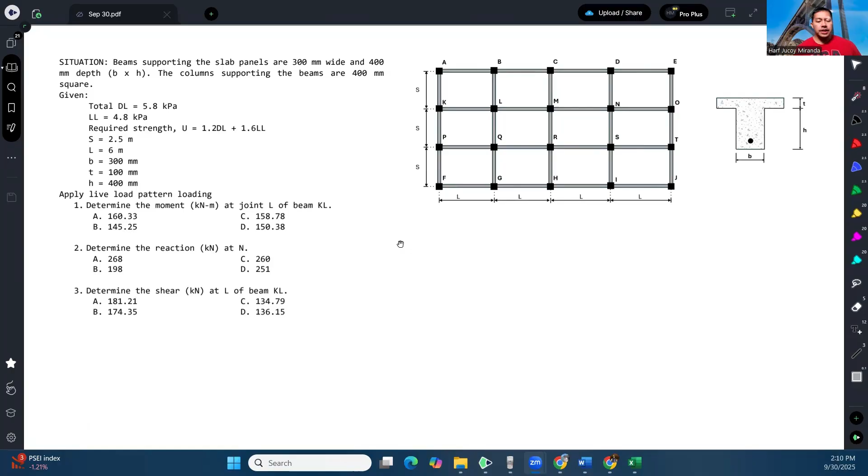Okay, so starting off with this situation. Beams supporting the slab panels are 300 millimeters wide and 400 millimeters deep. The columns supporting the beams are 400 millimeters square.

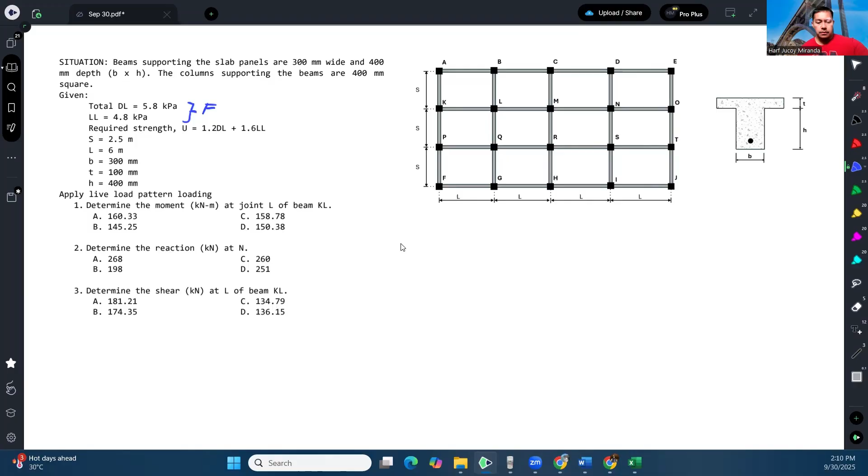We are given the total dead load and live load, both in kilopascals, meaning they are currently floor loads. And then we are given the required strength, meaning the load combination we need to apply.

So it's 1.2 dead load plus 1.6 live load. And then we are given the value of S, which is 2.5 meters, and the value of L is 6 meters.

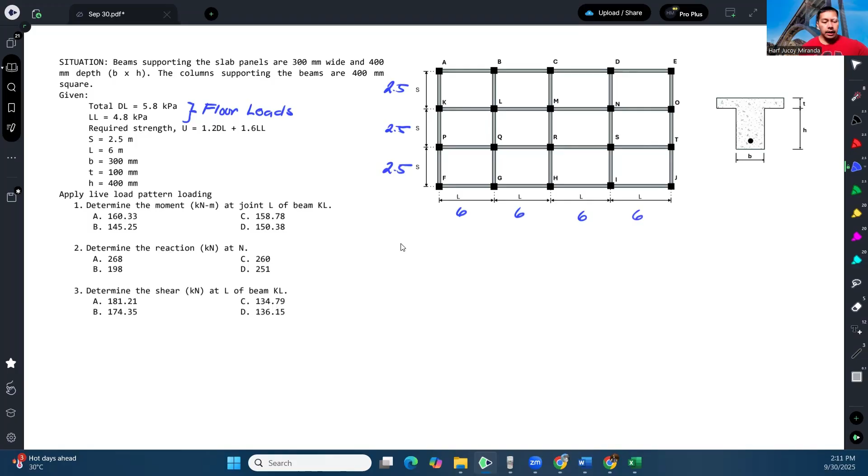We're asked to apply the live load pattern. So you will be given the following, the different patterns for live load. This is for four-span.

Continuous beam. Now, first question: determine the moment at joint L of beam KL. So this is beam KL, and we're asked to find the moment at L itself, on the left side. Actually, what's being asked is the maximum moment.

The maximum possible moment at joint L. And then next, we are asked to find the maximum possible reaction at N, at column N. And then determine the shear, or the maximum possible shear, at L for beam KL.

So first of all, we have to analyze, because we are given floor load. It seems that these loads are acting on this entire floor.

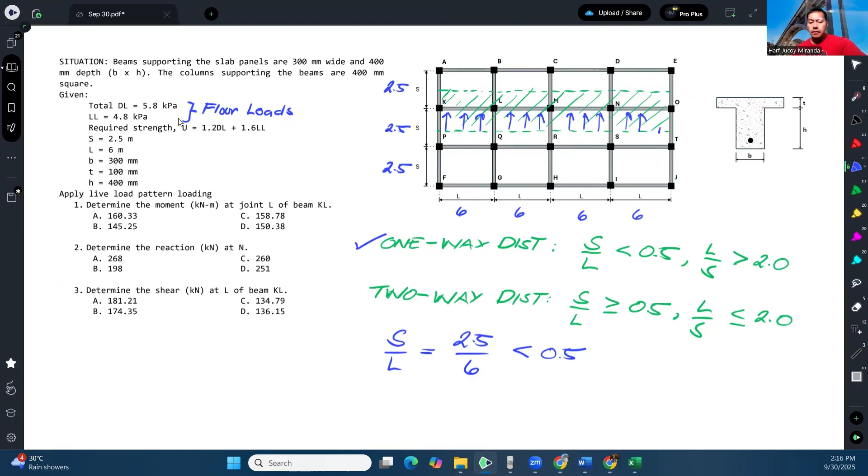Okay, and yung galing dito sa ibabaw, and basically yung magiging tributary width natin na ito, which is also equal to S na 2.5. Kasi same lang naman siya.

So half netong 2.5 plus half netong 2.5 will just be equal to 2.5. So meaning, we can now convert itong mga floor load na to. Tawagin ko na lang to na Q dead load tapos Q live load. Yan yung tawag ko sa floor load. Naka-Q muna siya kasi naka-kilopascal pa. So para ma-convert yan sa uniform load, we will just multiply by the tributary width.

Multiply lang natin ito. So we will have W dead load equal to Q dead load times yung tributary width, which is yung 2.5. So that would give us 5.8 kilopascals times 2.5, that gives us 14.5, and this is now going to be in kilonewton per meter. Kasi di ba originally ito kilopascal? Kasi ito naman naka-meter, so cancel, kaya magiging kilonewton per meter.

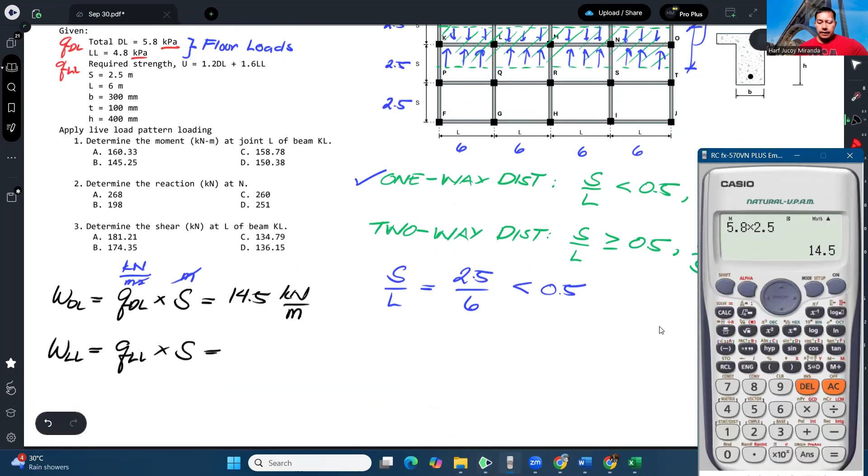And then ganun din ang gawin natin para sa live load. Yung floor load ng live load times yung tributary width, and that would give us 12 kilonewton per meter.

Okay, so meron na tayo nung distributed load na dead load and ng live load. Now, also I want to mention that since ito ay total dead load na, wala na tayong pakialam dito, dahil total dead load na yan, so ibig sabihin kasama na dito yung self-weight nung beam. Otherwise, gagamitin natin to, yung cross-section niya, kailangan natin computein yung self-weight niya. Pero for this particular problem, sabi kasi dito total dead load na yan, so hindi natin kailangan computein yung self-weight nung beam at saka nung slab.

Alright, so that's it, yan ay mga loadings natin. So ngayon, parang lumalabas na itong beam KLMNO, we will now analyze that in this particular section. Kunin ko lang to section na to. Ayan, section na yan, tawagin natin na section AA.

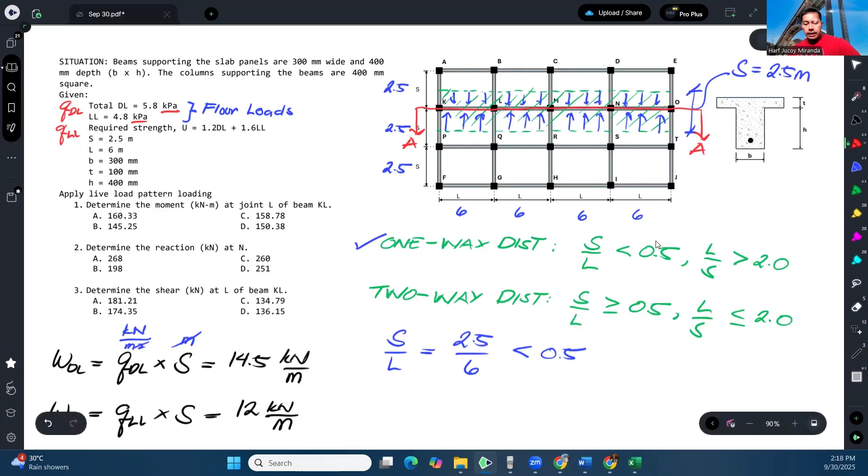So ang itsura ng section AA, bali ganito, lumalabas na ito yung beam na yan. Tapos yung support K, ito yon. Yung support L, ito naman yon. Yung support M, ito yon. Tapos ito yung support N, and ito yung support O. So K, L, M, N, and O, yun yung beam natin.

So as you can see, ano siya? Continuous beam na 1, 2, 3, 4, 4 span continuous beam. And dito again, pinapahanap lang ano yung moment dun sa joint L for beam KL. So pinapahanap lang yung moment dito.

So para makuha yon, of course, sabi niya apply live load pattern loading. So ibig sabihin, una, hindi natin pagsasamahin itong dalawa, kasi pag sinabi nating dead load, yung pattern loading does not apply to dead load. Paliwanag ko lang kung ano bang ibig sabihin ng pattern loading. Ang ibig sabihin lang yan, guys, ay yung lahat ng possible combination na kung saan loloadan natin itong beam na to.

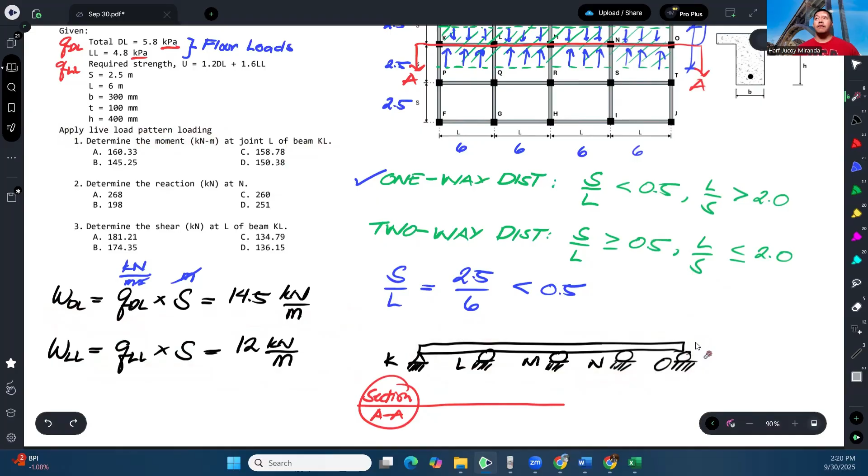Kasi di ba pag sinabi mong live load, pwedeng lumipat-lipat yan eh, pwedeng mag-transfer yan from one point to another. So well, it is possible na yung live load natin will be acting all throughout the span, pwede naman. Kaya lang, it is not necessarily the most critical condition or situation. So minsan kasi nagiging ka for a specific criteria or parameter na gusto mong hanapin, like reaction or shear or moment, minsan kahit na-loadan mo lang siya ng isang span, mas nagiging critical yon.

Alright, kaya kailangan nating ma-identify ngayon kung saan yung proper o saan dapat yung most critical na loading condition for live load. For number one, para ma-achieve natin yung maximum moment dito sa L na to. Okay, but like I said, kapag dead load, hindi natin kailangan i-pattern loading.

So ang dead load natin ay basically, ilo-load na natin to sa lahat. So let me just copy this for later, gagamitin ko siya later. Ito na lang.

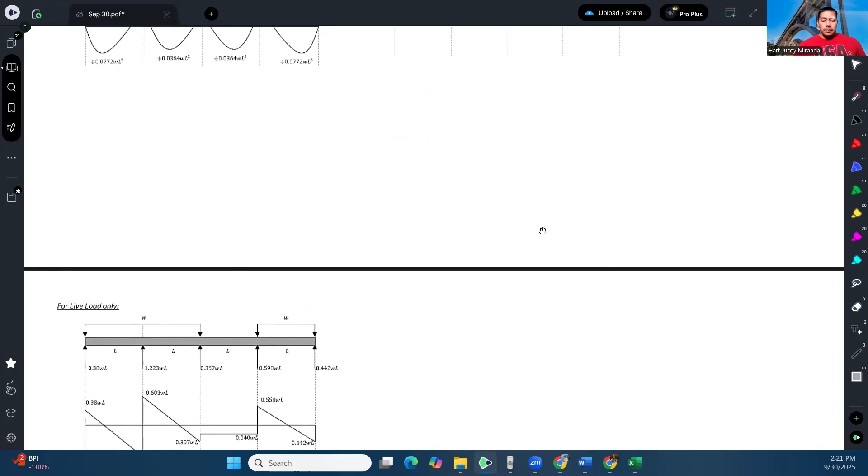So for dead load, kailangan i-load natin ito lahat. So yun yung magiging dead load natin. Kasi wala tayong choice kapag dead load, lahat yan dapat meron load. Kasi pag sabi mong dead load, yun yung self-weight, yun yung mga permanent fixtures na nasa structure, kaya hindi na yun gagalaw. Kaya lahat na lang, merong dead load.

Okay, pero be careful, itong dead load na to should be factored. Ang factor ng dead load ay, according to the problem, 1.2, which is pretty much basic na load combination. So, this is 1.2 W dead load.

Okay, so ibig sabihin, pwede na nating malaman kung ano yung moment dito due to dead load. So, bali, lumalabas ngayon dito sa binigay na pattern loadings, itong condition na to ng dead load is being represented by this loading condition.

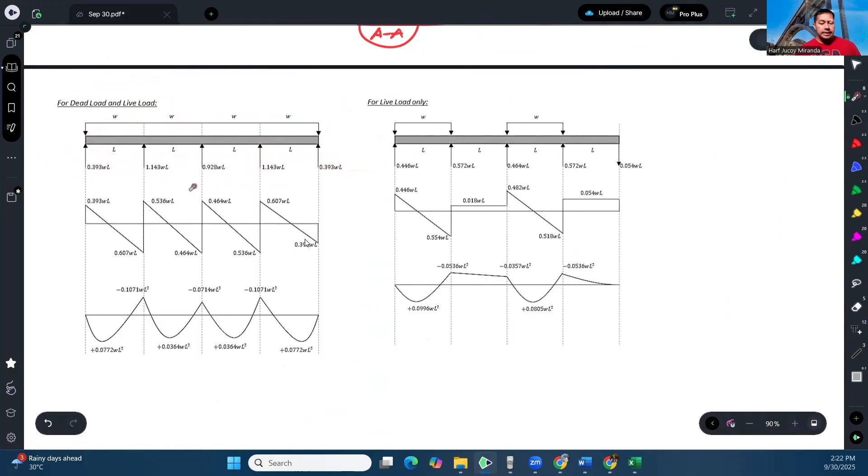Okay, and because yan yung loading condition natin for dead load, nasaan ba dyan itong L na to? So, itong L na to can be either this particular support or this particular support. Kahit alin dyan. So, you might be thinking, sir, bakit kasama to? Hindi ba pwedeng ito lang kasi ito yung katapat niyan eh. Well, guys, ito kasing four span continuous na to, it could be mirror, no?

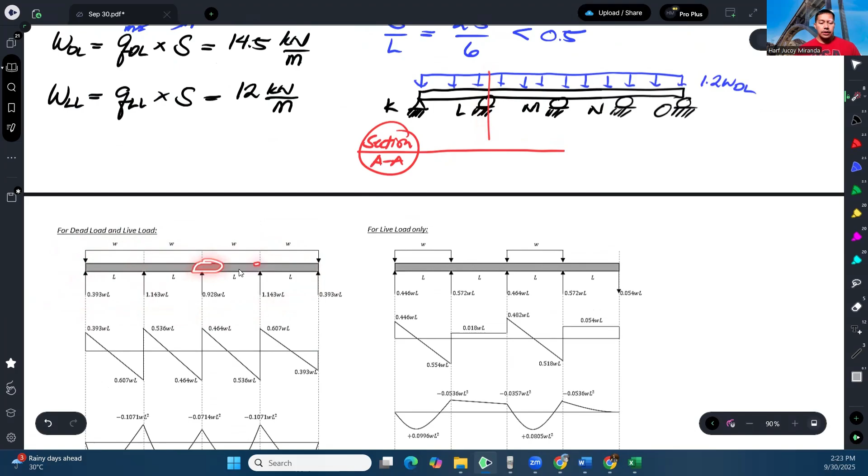Ibig sabihin, pwede na ito yung K natin, ito yung L, ito yung M, ito yung N, ito yung O. Pero in mirror form, kung kapag doon ka nakatingin, instead na sa AA ka nakatingin, dito ka sa kabila nakatingin. So, baliktad. Magiging ito yung O, ito yung N, ito yung M, tapos ito yung L, tapos ito yung K. So, ibig sabihin, pwede rin to maging L. So, we have to consider that scenario na mirror, no?

So, well, dito naman walang problema eh. Whether you are using this or using this, you will end up with the same moment, no? Same lang naman. Okay, so negative 0.107 W L squared. So, due to dead load, no?

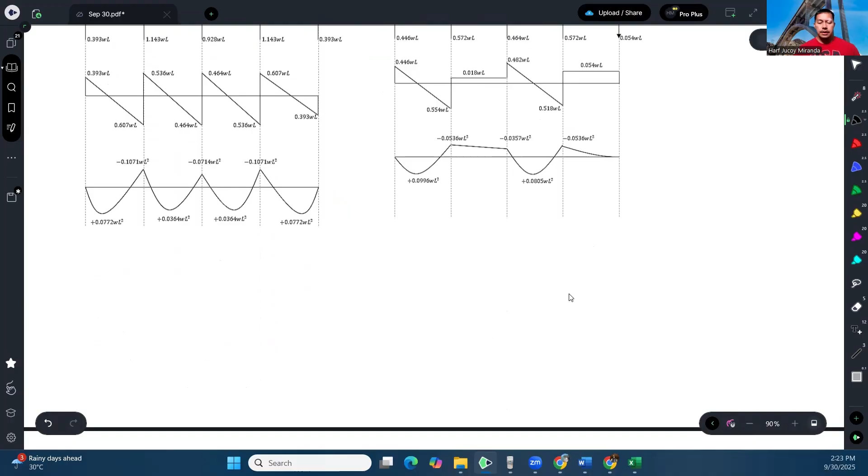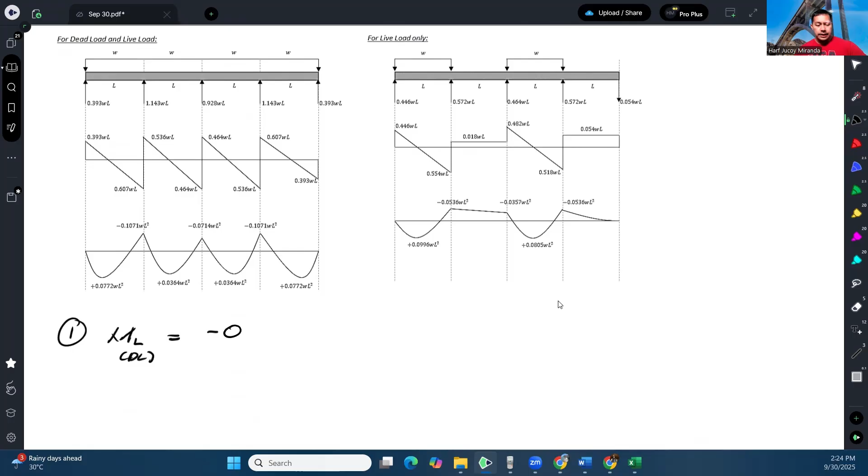For number one, ito na lang. Yung moment sa L due to dead load will be equal to negative 0.1071 W L squared. So, syempre, ito ay dead load. Pero dapat factored ito, ha? So, factored ito, bali, lalagyan ko ng 1.2 W dead load, tapos L squared. Okay, and then guys, yung L natin dito is basically yung 6 meters.

Ayan. Okay? So, compute na natin. So, this would be negative 0.1071 times 1.2. Tapos yung dead load natin was 14.5. And then 6 squared. So, that will be the moment at L due to dead load only. No? So, as you can see, hindi ko siya pinagsama. Okay, and that gives us negative 67.087.

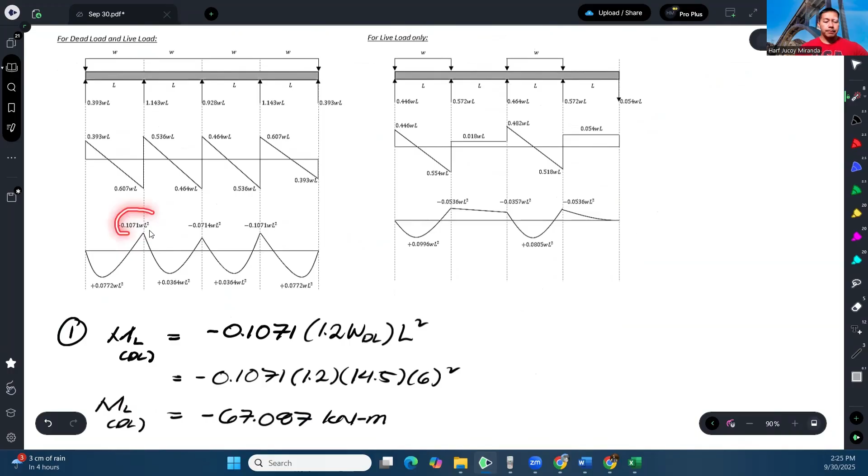Ayan. Okay, so hindi pa yun yung sagot natin. So ngayon, pag-isipan naman natin kung saan ba ma-achieve or paano ba yung itsura ng loading for live load para ma-achieve yung maximum moment dito. So kapag niloadan natin to lahat ulit ng another live load, 'di ba? So ito pa rin yung gagamitin natin na formula, 0.1071 WL squared.

Ngayon, i-consider natin tong case na to. Kapag itong case na to, nasaan dyan yung L? Di ba pwedeng ito or pwedeng ito? Okay, so kung kapag ito yon, ang moment na gagamitin ay negative 0.0536. So kung i-compare mo dito, mas maliit to. Kaya hindi yan mag-govern.

Sa kabila naman, ganun din eh. 0.0536 yan eh. So again, mas maliit siya compare dito. Kaya hindi rin to mag-govern. So ibig sabihin, hindi ito mag-govern na pattern for the live load kasi mas malaki pa rin to. So tingnan natin isa pang pattern.

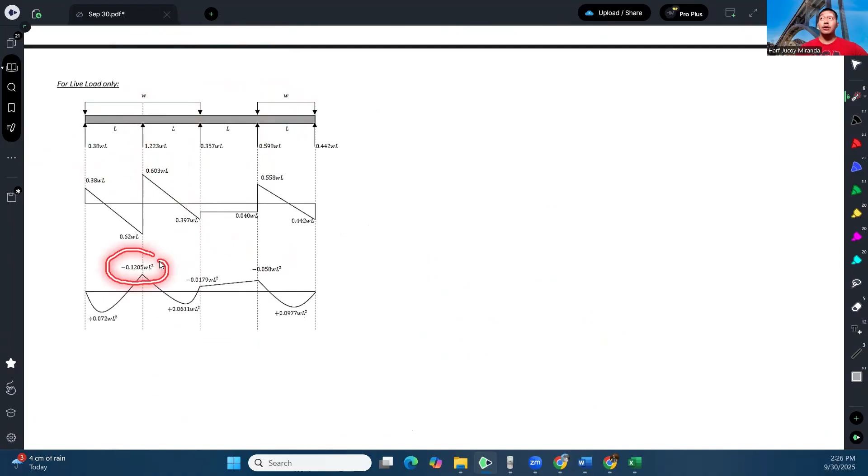Ito naman. Ito naman, no? So for this pattern, ito yung L natin or ito. So kung dito tayo sa L na to, ang moment natin is negative 0.1205 WL squared. Well, dun pa lang, nakikita nyo na mas malaki siya compared dito. So ibig sabihin, this will govern over this.

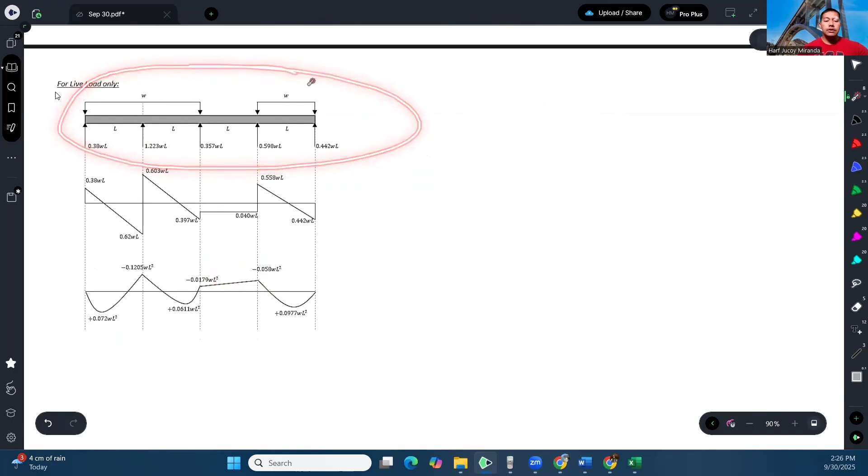Okay? Kung titignan naman natin itong portion na to para maging L, ang magiging value lang ng moment dyan ay 0.05. So mababa. So ibig sabihin yung critical loading pattern for the live load to produce the maximum moment at this portion is itong condition na to. So ibig sabihin, ito nga yung susundin natin na load pattern para sa live load.

So bali mangyayari guys, ganito yan. Dito natin nga ipapatong yung live load. Yan.

So meron tayo dito sa span na to. Okay, ito naman yung magiging 1.6 live load natin. Alright, so yan ngayon yung parang loading condition na kung saan worst case yung moment dito sa L na to, sa portion na to. Ma-achieve natin pinakamalaking pwedeng maging moment dito. So ibig sabihin hindi necessarily na lahat loloadan mo. Kaya ganun, no? So ibig sabihin for live load, ito ngayon yung mag-govern.

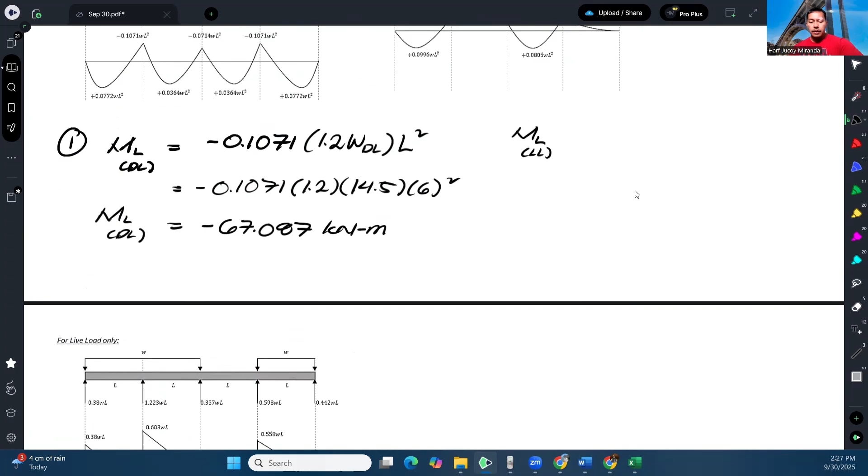Ayan, so lagay ko lang dito. So moment at L due to live load will be equal to negative 0.1205, W, kailangan factored, 1.6 W live load times L squared. So lagyan natin ang value, negative 0.1205 times 1.6. Tapos yung live load natin was 12, times 6 squared. And therefore, the moment due to live load at L is equal to, okay, so that's negative 83.290

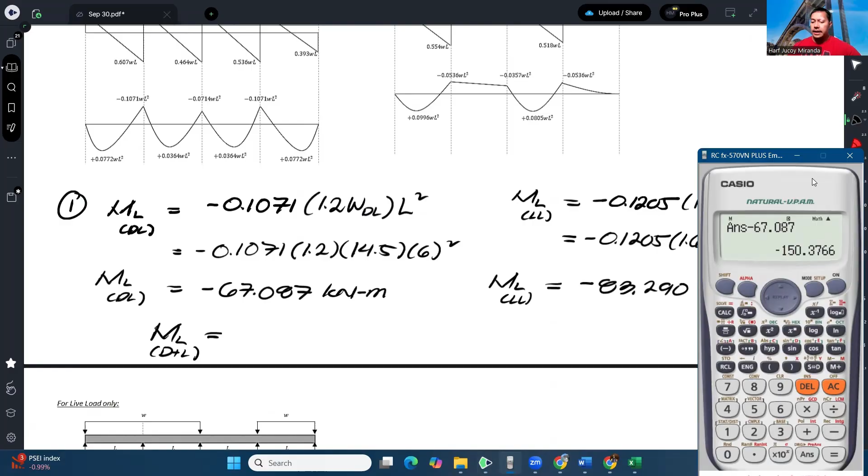kilonewton meter. So therefore, the total moment at L due to dead and live, dead plus live would be equal to, okay, so 150 point, let's say 38 kilonewton meter. And this will be our answer for number one. Okay? So here, our answer would be letter D.

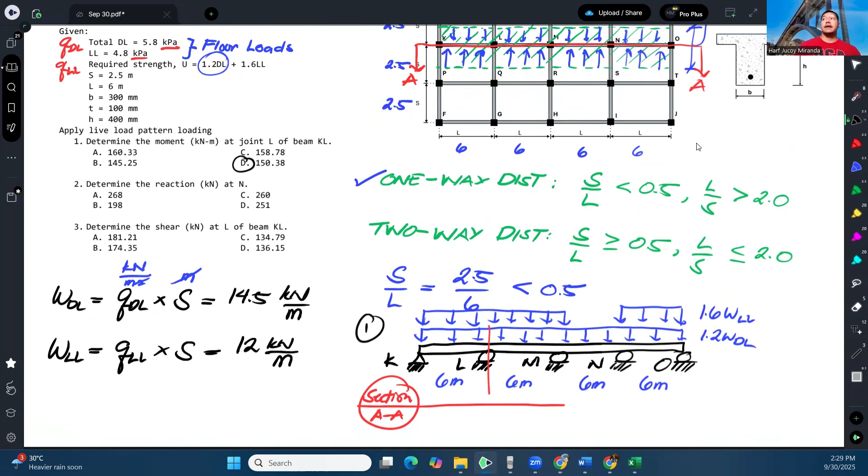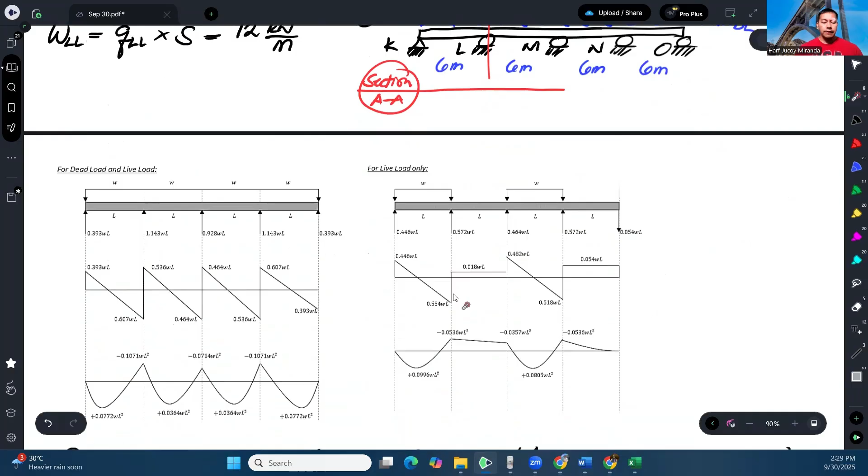Okay? So again, may mako-confuse dito. Sir, bakit ganon? Hindi ba pwede na parehas na lang sila na live load and dead load na nandito lang tapos nandito lang para mas malaki pa yung moment sa L? Actually, habang ginawa natin yun, mas malaki pa makukuha mo. Halimbawa, buo yan, tapos nandito lang din. So ibig sabihin, ang gagamitin natin na coefficient is parehas 0.1205 WL squared for both dead load and live load. So ang makukuha mo doon na value ng moment sa L, mas malaki.

Kaya lang, hindi po pwede yun. Kasi ulitin ko, kapag dead load, wala po tayong option na ilipat-lipat siya or applyan siya ng pattern loadings. Dahil dead load nga yun. At pag sinabi mong dead load, stationary lang yun o di kaya ay naka-permanent siya na nandoon sa buong structure or sa buong beam. Kaya ang ina-apply natin ng pattern loadings is yung live load. Okay? Kaya this is the correct answer.

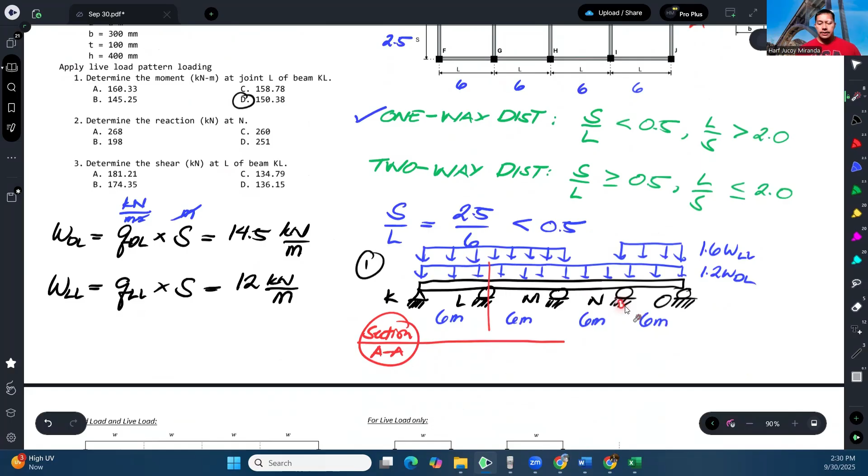O next, determine the reaction at N. So ngayon naman, ang kunin natin is yung mas malaking reaction sa N. N naman, ito, so dito naman. So paano natin kukunin yung maximum reaction dyan? So ito naman kunwari number 2. So kailangan ulit at ma-figure out ano ba yung magiging reaction. So well, first of all, ulit, yung sa dead load, wala tayong choice. Laging ganyan yan, buo yan. Okay? So ang hinahanap natin yung maximum possible reaction dito.

Okay? So this is, once again, 1.2 W dead load. So for dead load, reaction at N due to dead load will be equal to, so tingnan natin yung pattern loadings. So dito tayo tingin. So bali, ito yung N, o pwede rin ito kapag mirror, di ba? So for both cases, ito lang yung reaction natin, 1.143 WL. So yan na yun. So 1.143 W, rather, should be factored, 1.2 W dead load times L squared. So lagyan na natin ang values.

So ang dead load natin was once again 14.5. Tapos 6 squared. So that would give us the reaction at N due to dead load. Ay, sorry, hindi to naka-squared. Okay, so WL lang ito. Okay? So that gives us 119.329 kilonewtons. Okay, so that is due to dead load only.

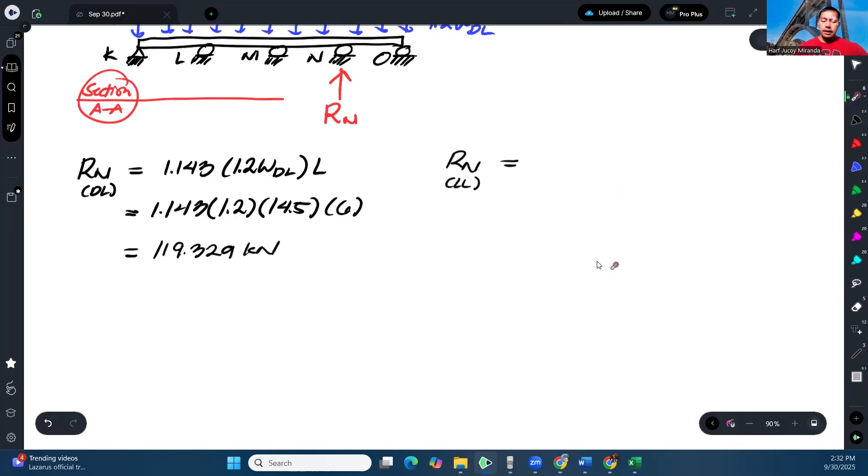So ngayon, isipin naman natin ano yung magiging maximum reaction sa N, due to live load. So if you consider once again this pattern, once again, 1.143 yung coefficient natin. Kapag consider naman natin itong pattern na to, ito yung N natin o di kaya ito. So as you can see, for both, the coefficient is only 0.572. So hindi naman ito yung mag-govern. So dito tayo. Pag dito naman, yung N natin pwedeng ito, pwede rin ito. Kung ito yung N, ang coefficient mo lang 0.598. Kapag ito yung kinonsider mo na N, ibig sabihin, ang coefficient mo naman ay 1.223 na mas malaki sa 1.143.

So ibig sabihin, ito ngayon yung pattern na to ulit ang mag-govern para sa maximum reaction at N. Kaya lang dapat mirror. Mirror siya. So ibig sabihin, dito sa loading na to, kasi nandito yung N natin eh. Dito parang kinonsider mo ito yung N eh. So ibig sabihin dapat ito yung loading dun sa N. So bali, ganito yan. I-mirror din natin yung pattern loading. So dito tayo ilalagay yun.

Okay, and here's the other one. So this is going to be our 1.6 W live load.

So therefore, the reaction at N due to live load: the coefficient is 1.223, times 1.6 of W live load times L. Substituting the values, this is 12 times 6.

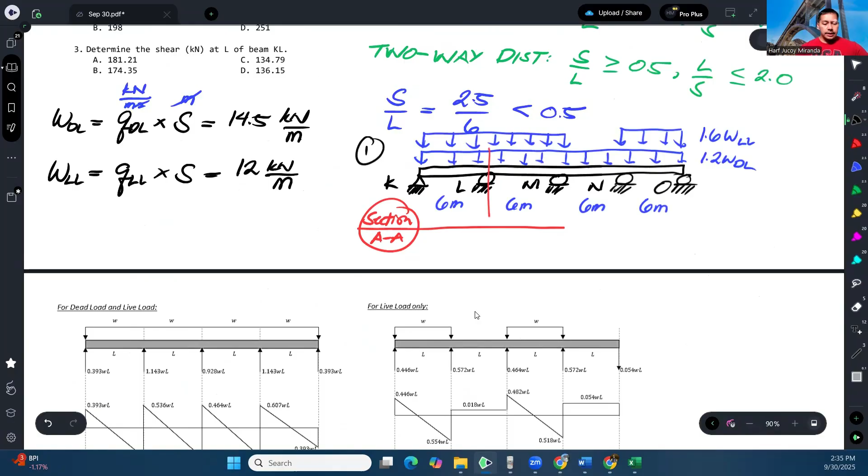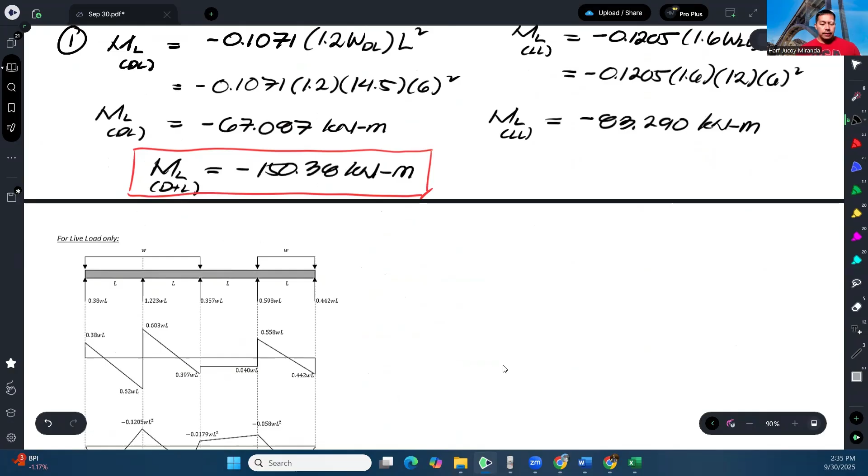Okay, now the last question for this situation: determine the shear at L for beam KL. So we're looking for the maximum shear at L. Same approach again, for number 3, let's say our beam is like this, blank.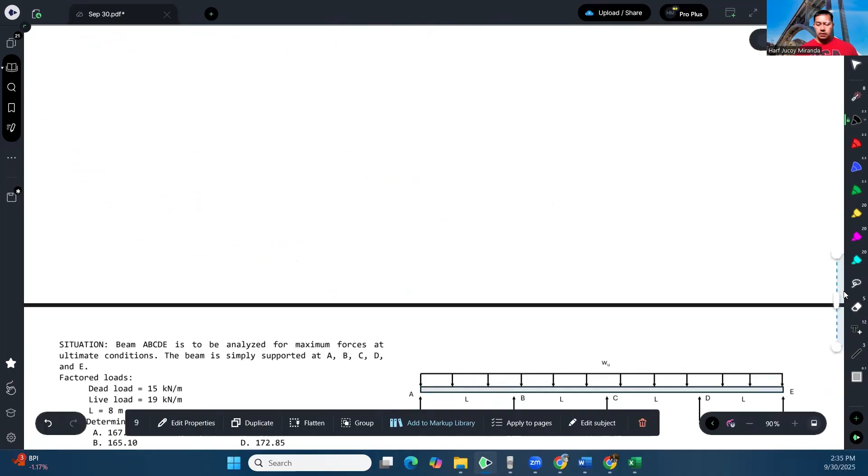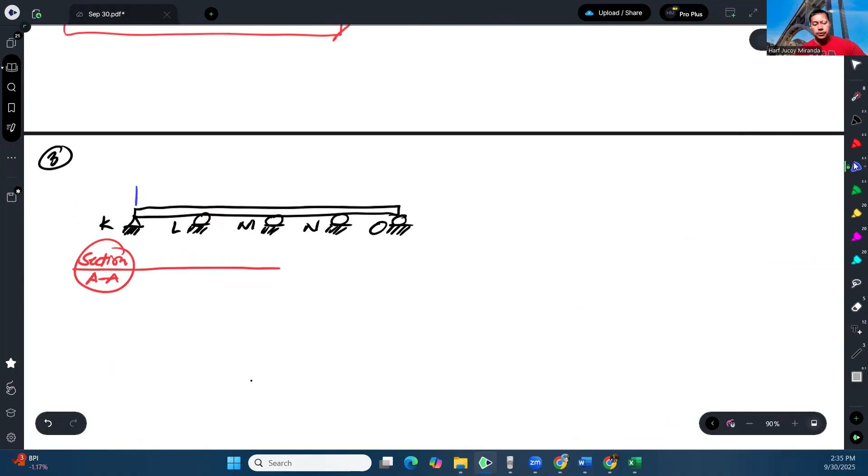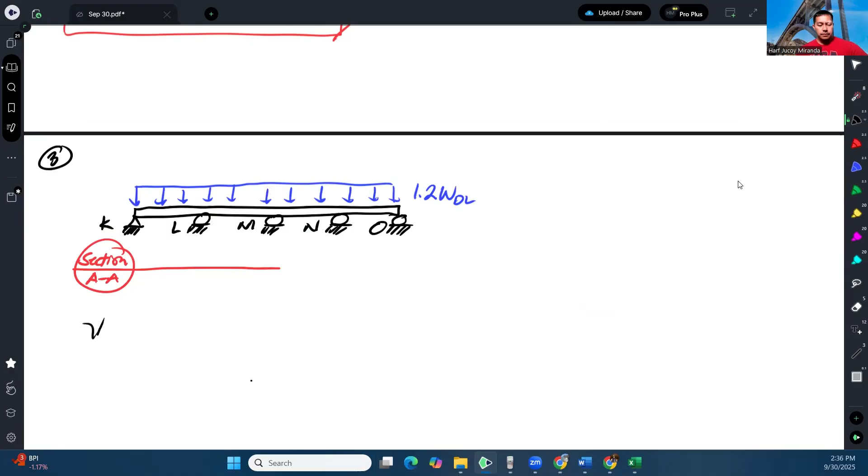Okay, what we want this time is the maximum shear here. So again, for dead load, we have no option but to load everything. So 1.2 W dead load. The shear at L due to dead load is equal to - let's check the shear pattern, this is the one.

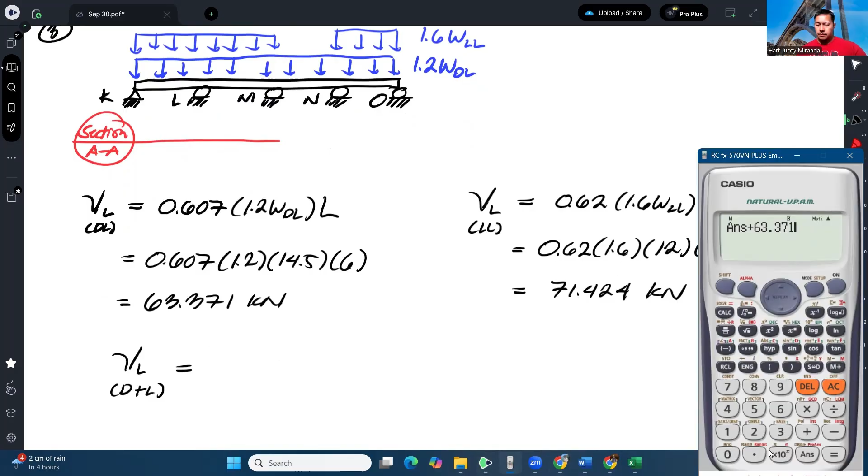So therefore, our total shear at L due to dead plus live is 134.795 kilonewtons. And that would be our answer.

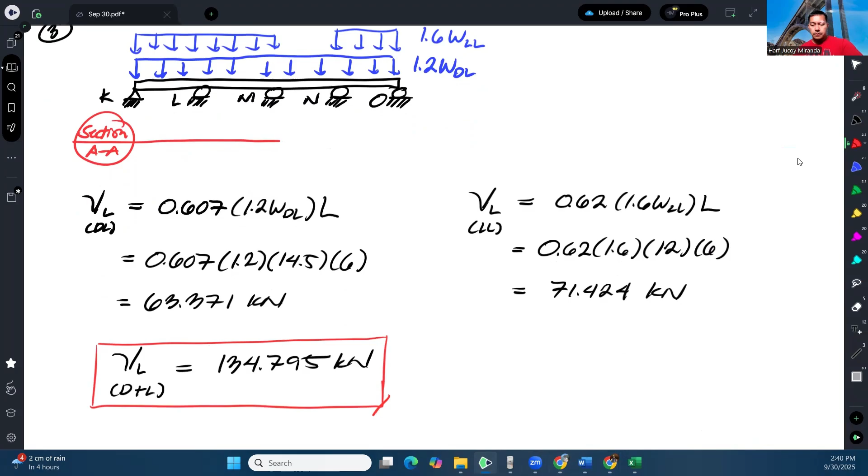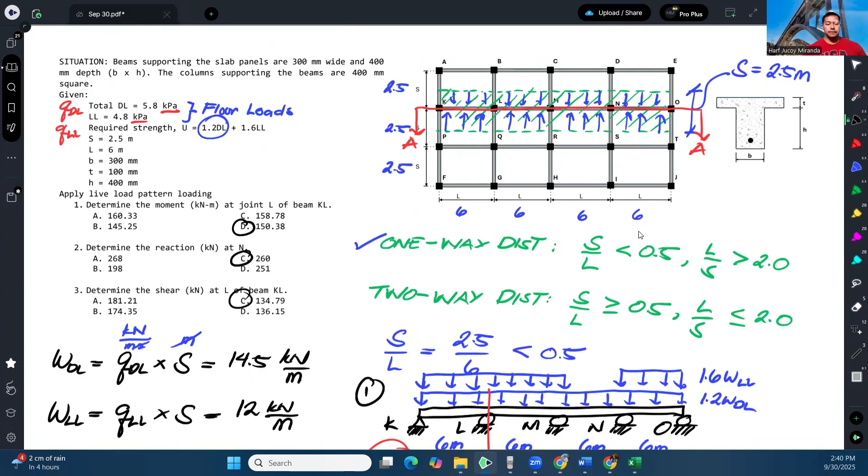Okay, so for number 3, our answer would be letter C. Okay, and that's how we solve this problem.